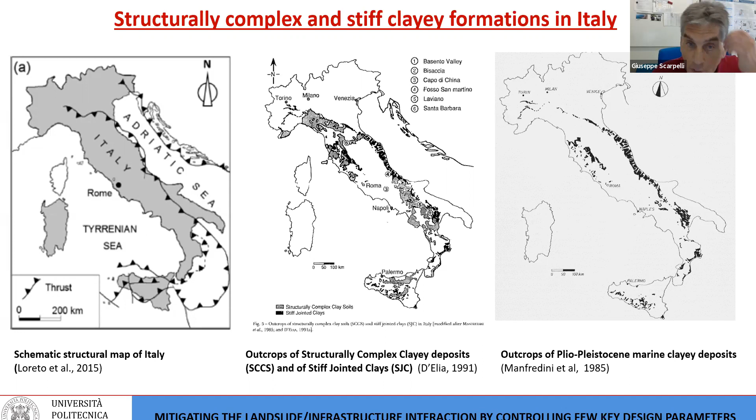So here's a structurally complex clay deposit, a Pleistocene deposit diffused in Italy, and we know how big the difficulties are in building infrastructures in such an environment.

Before entering the main core of this speech, I want to highlight some issues coming from the new generation of Eurocode 7, where I've been involved for many years. I believe the new Eurocode represents a significant change with respect to the present Eurocode 7 because of the introduction of rock mechanics. Rock mechanics is now a true issue within the geotechnical design code in Europe.

Although Eurocode 7 does not account explicitly for complex formations, new issues such as fissures in ground, geotechnical properties of rock masses - so that ground properties shall be distinguished when referred to intact material versus the mass in place - and the influence of geometry and qualification of discontinuities on the properties of rock mass are very appropriate when dealing with structurally complex formations. So I think we now have an umbrella that can cover the complexity of our countries, especially in Mediterranean areas. So we have to update our terminology.

The ground model has been introduced, which differs from the geotechnical design model. It is an important distinction, not always well accepted in all cultural environments in Europe, but nevertheless it's a very important distinction. The ground model is a site-specific outline of the disposition and character of the ground and groundwater based on results from ground investigation and other available data.

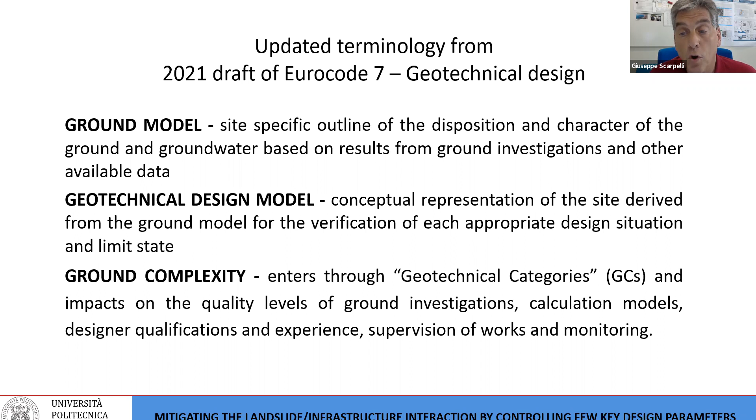Again, the word complexity is actually entering Eurocode 7, which is really important. Due to the joint work of Italians, Spanish, and French people, ground complexity is now a word common in the general idea of Eurocode 7, entering through geotechnical categories. These geotechnical categories impact the levels of ground investigation, the selection of calculation models, the qualification of designers, the supervision required for the works, and the monitoring. So it's an important aspect.

To summarize this bit of the presentation, this is a nice picture taken from Gunilla Franzén and Hakan Garin from the Eurocode 7 people. You see there is a clear separation with this line between the ground model and the geotechnical design model. The knowledge increases from top to bottom. No geotechnical parameters are in the ground model, but derived values of the geotechnical properties are in it. With some time I can explain exactly what it means to be derived values, but these are not exactly the geotechnical parameters for design.

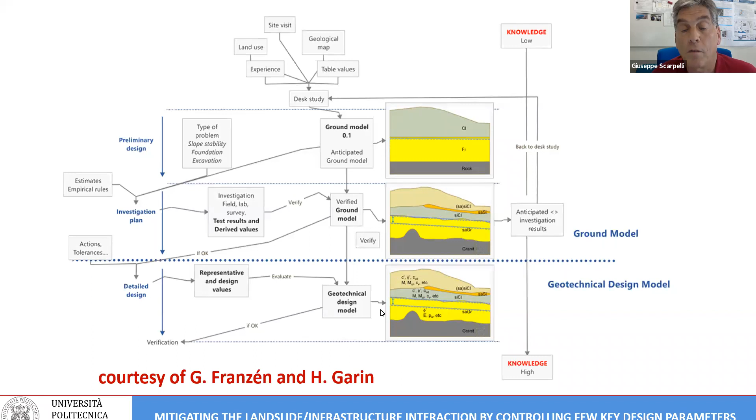So now, according to D'Elia, the complexity of a geological formation is related both to the heterogeneity at laboratory scale and the structural feature at the scale of construction. We have to investigate both, obviously, to be careful geotechnical engineers.

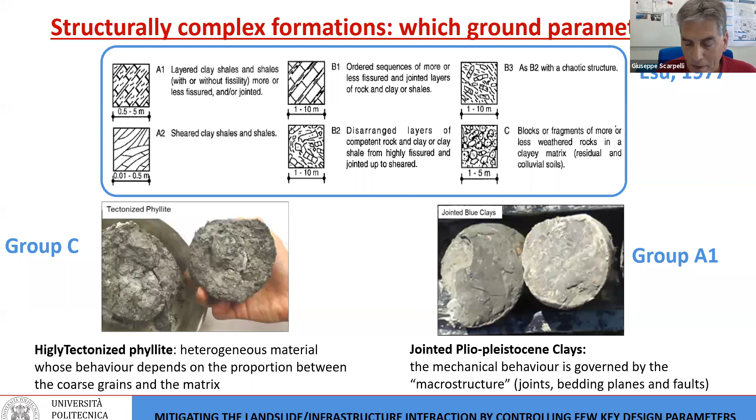With reference to the laboratory scale behavior, just to give an example, I want to stress the first example on the left, the work on this highly tectonized phyllite. It's a heterogeneous material, the response of which is dependent on the proportion between the coarse grains and the relatively soft clay matrix. I have seen a presentation about that in the past days, and it is clear that the friction for this material has to be selected according to the proportion of the fines, to the grading.

Very nicely, the methodology of using reconstituted samples, reconstituted mixtures, can actually help in selecting the appropriate value of parameters or properties with reference to the natural material. It's difficult to be sampled, but nevertheless we can use appropriate methodologies in the labs to understand what could be the right properties to select.

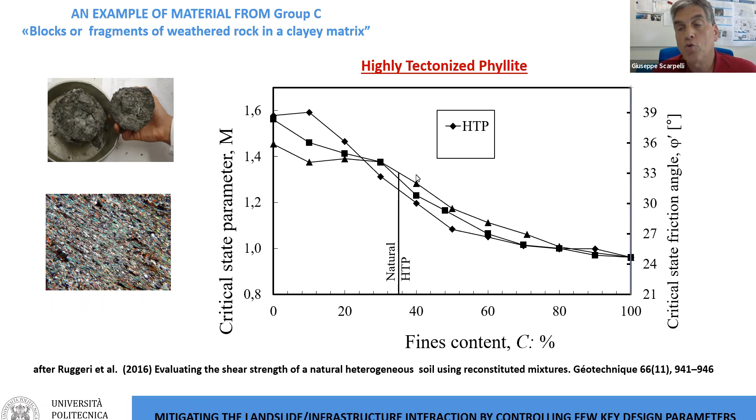And it is important to see how big changes are when you pass from the grain sustained material to the matrix sustained material.

Addressing the problem at the geotechnical work scale, we have to select one model: should a geotechnical model be a continuum model, or a discontinuum model? Here we use the definitions from before. The ground model is the same. If we look at this excavation, the ground model is the same, but the geotechnical model is different.

For the solution of the stability of this excavation, on one side, what is the right geotechnical model to select? An equivalent continuum can hold in this case, but cannot for the discontinuum on the other side.

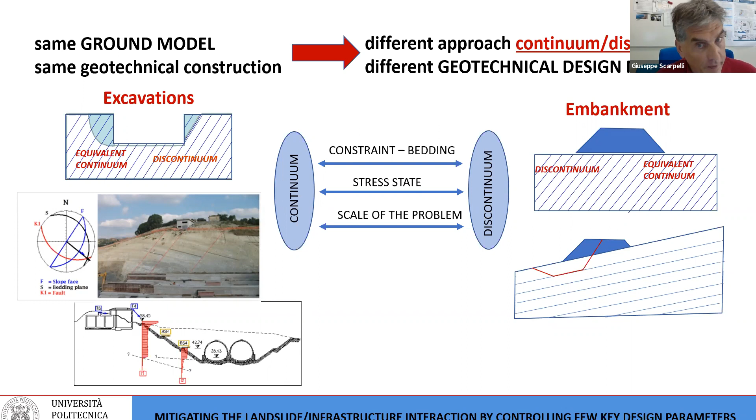We have seen today some important reflection of how the stress state can influence the overall behavior of the excavation, and the scale of the problem, of course.

The case study I want to address is an embedded retaining wall in stiff jointed clays to protect an excavation, not very deep, a 6.5 meter high slope. The place is in the south of Italy, again along the E90 European route, and this place is called DG21, a specific segment near Catanzaro.

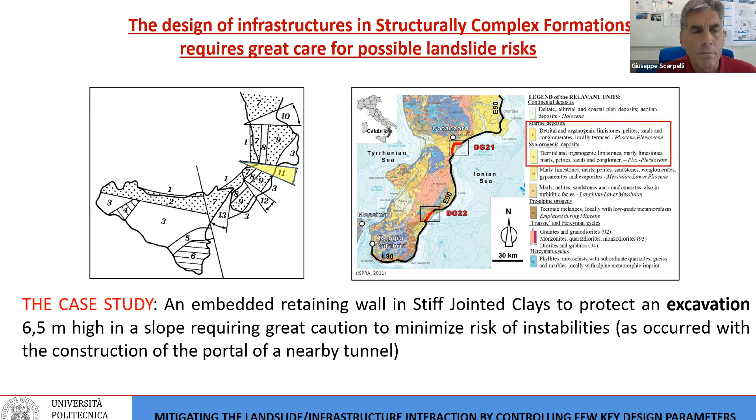The case study is interesting because, for such a small excavation, the designer's decision was to adopt a very big, very strong retaining wall, made of 1 meter and 2 bored piles, all connected with a strong beam on top. It seems really a large geotechnical work for such a small excavation.

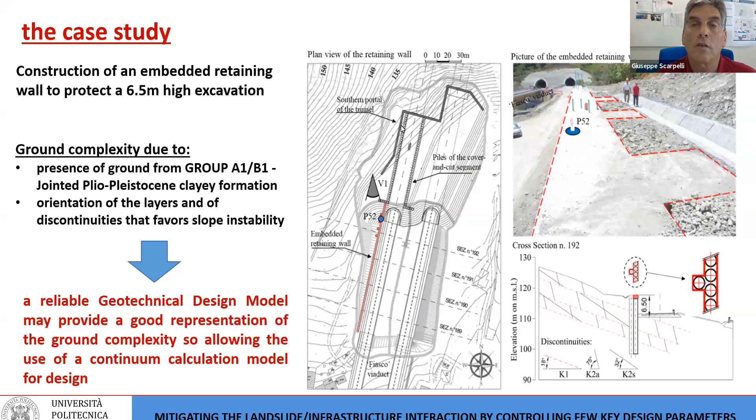But the slope was not very safe. The slope itself was affected by bedding, by discontinuities, associated with movement along the beddings. We recognized that through the experience made just a few months before with the behavior of these retaining structures at the portal of the tunnel in the nearby area. This is clearly appearing in this slide, the problem coming from that portal.

And here we have the displacement being measured by topographic survey during the excavation of the wall.

These are the evolution of the horizontal displacement during the progression of the excavation, with tension cracks opening and making free the advancement of this soil deformation along this slope.

Again, the recognition of the ground model was a bit poor at the very beginning, and then it was the experience, a sort of observational method—not the right way to apply the observational method, obviously—but the observation made clear how useful it can be to know in advance the exact assessment of the ground model at the beginning.

And so we had to solve the problem in a very similar way for the tunnel, as was presented before by Professor Jovicic, with prolongating the tunnel, cut and cover methods, and trying to reduce as much as possible any stress release in the slope.

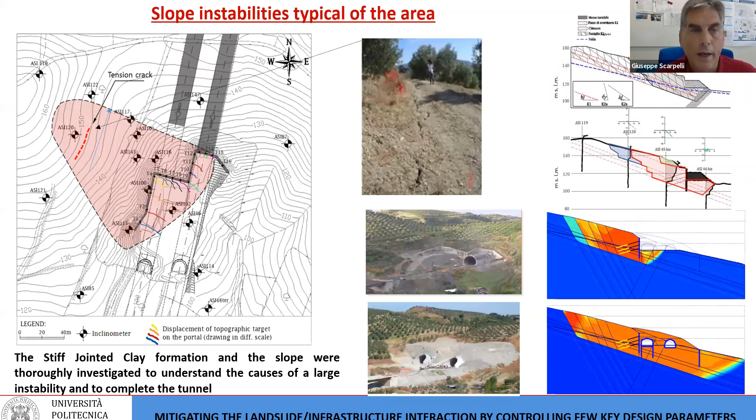What is very important is that we need really to characterize properly the ground model. This was done as a consequence of the instabilities and the movement at the tunnel portal, so we had a clear occasion to use every tool: site inspections and geological mapping.

Also, I want to note that geological mapping is a word that is clearly coming into Eurocode 7. So it's good to hear about that today.

At the tunnel front it was possible to make all the observations needed to clarify the ground model, and also the properties of the ground, with samples at laboratory scale.

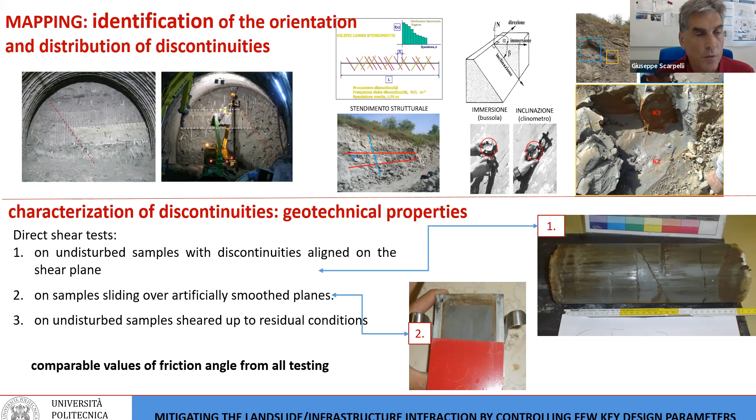Obviously, it was necessary to characterize the discontinuities, expecting that the movement could occur mostly along them. We tried different techniques to minimize the strength along these discontinuities, with not very much success, I would say.

Here we have a look at the whole picture of the laboratory testing results. We have unstable, brittle behavior of samples, and we could characterize peak strength. We could also characterize what we could call residual strengths along the discontinuities.

It's nice to see that during the coring from the boreholes, it was possible to have an idea of the position of such discontinuities—not really directly observable, but just by breaking these cores by hand in order to highlight where discontinuities were.

And looking at the profiles of inclinometers placed along the slides, it is clear that some discontinuities are clearly active from these profiles.

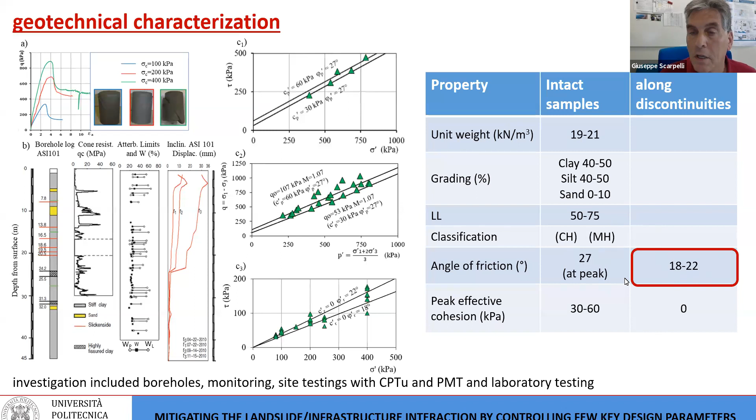Values of the angle of friction along these discontinuities appear to be a bit high with respect to the plasticity index, to the soil plasticity, but well, that was what came out from the results.

How do we manage such complexity in practical design of infrastructures? A possible solution is to condense complexity into representative geotechnical design models and analyze the problem with the simplest possible calculation model. This is a possibility.

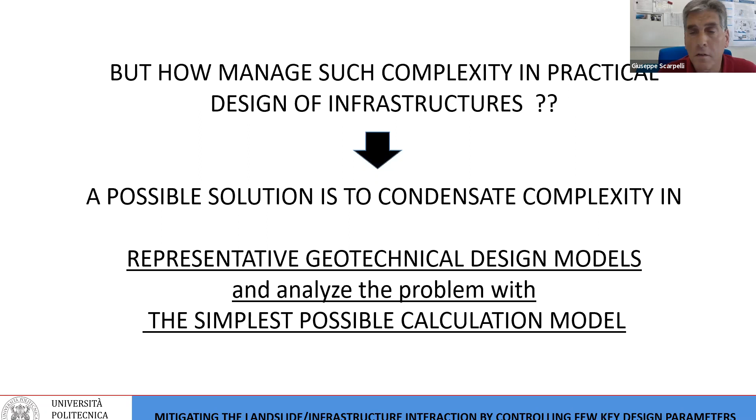And to do that, we want to understand—the object being the retaining wall—the question of how these discontinuities can influence the ground pressure on the wall. Remember, that is the problem: how to design that wall. Can we find a simple calculation model for the ground pressure prediction?

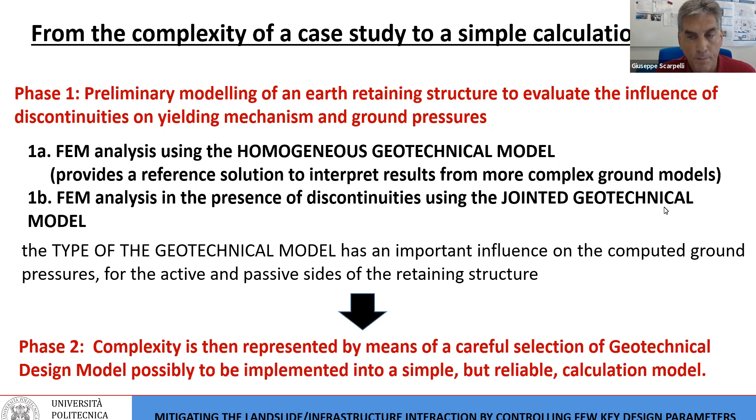So we tried to make an assessment using a finite element model, which is not a simple model, but just a way to arrive at the simple model. We adopted two geotechnical design models, one homogeneous and one jointed, with a very simple analysis using elastic-perfectly plastic soil, a Mohr-Coulomb kind of model.

It's a purely theoretical example where an earth retaining structure is artificially displaced into the soils to produce formation of yielding zones at the back of the wall and in front of the wall.

Displacements are imposed, and interface elements are adopted for the contact between the structures and the ground, and associated and non-associated flows were analyzed.

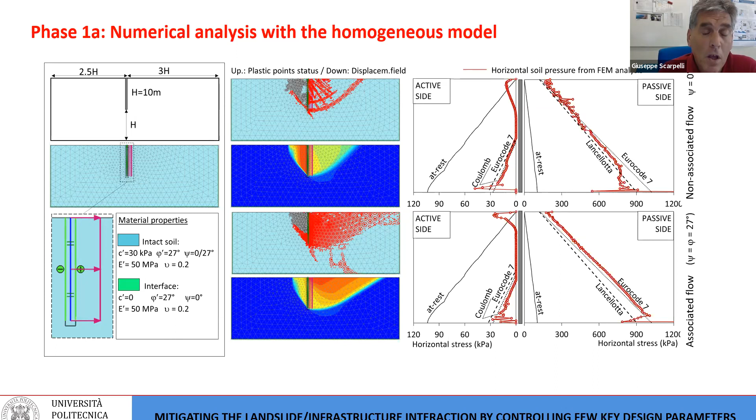What is the result of that? We want to understand whether the ground pressures were predictable with such a model in an appropriate way. There was cohesion in the constitutive model, so indeed we found no ground pressure on the active side, mostly. Perhaps the displacements were not enough to put the soil into an active state, but we were quite satisfied by the results in general, giving us a bit of confidence in the use of this model.

Then we introduced discontinuities, and this was quite interesting because we arranged discontinuities differently oriented to see what could be the influence on the wall, and then we discovered the hot water—meaning that when the bedding is in favor of the formation of yielding, then the ground pressures increase quite a lot.

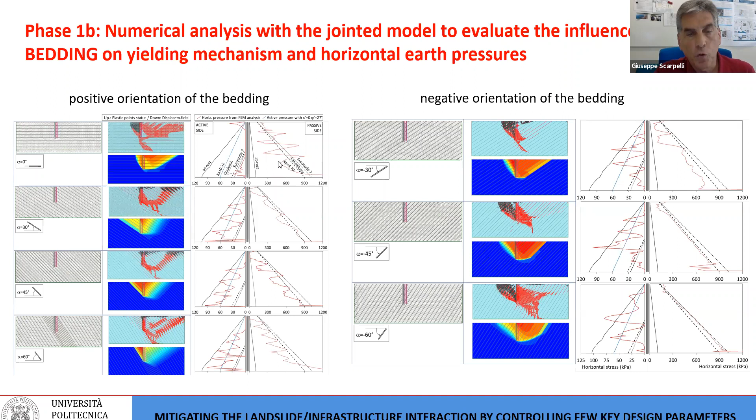I want to stress the results of applying such modeling on the active side: not much influence when the bedding is favorable, horizontal, or at a negative angle, but largely influenced when the bedding is unfavorable to safety. At the passive side it is moderately influenced by the bedding orientation. This is for the yielding mechanism, to understand the zone of influence around the wall.

For the earth pressures, at the active side the pressure distribution is strongly influenced by the presence of the bedding at any orientation, even when it's favorable. At the passive side, the pressure distribution is influenced a bit less, with about 20% reduction of passive strength, passive pressures in general. So what is the message here?

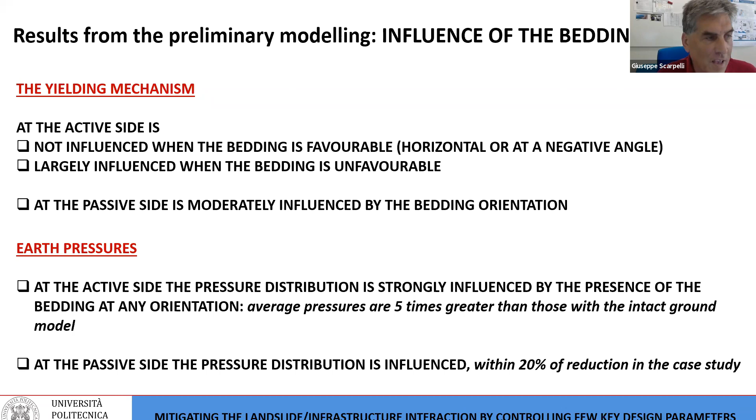Basically, to account for the presence of discontinuities in the model, we can consider an effect on the ground pressure by representing damage. Having introduced a lot of damage with all these discontinuities that actually interrupted the continuity of the model, introducing this damage as a continuous model with a reduction of strength parameters could be good enough for the purpose of design, not more than that, of course.

So the ground model includes discontinuities not favorably oriented at the active side. The geotechnical design model considers zones with different geotechnical parameters to account for the influence of discontinuities. We want to implement a very simplistic model with a spring reaction calculation model with limits, assuming different strength parameters in different zones.

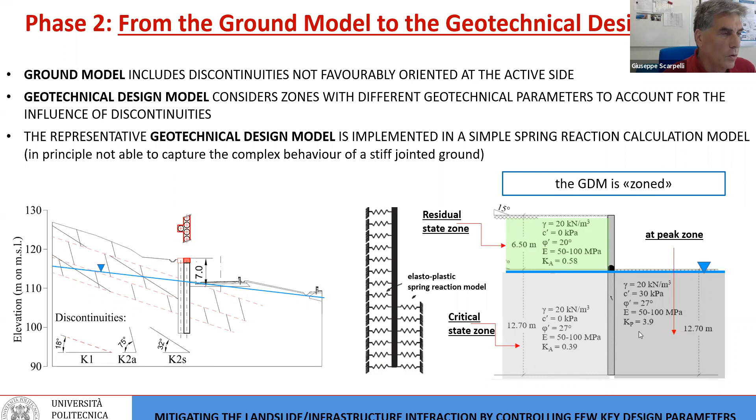So our geotechnical design model is zoned. How is it zoned? We assume a residual state zone at the active side above excavation, a critical state zone at the active side bottom of the excavation. Why a critical state? Because cohesion goes to zero there, but displacements were not enough to reduce friction to residual values. And a peak zone on the passive side, where there is not great influence of displacement on the original values.

What are the results? Ground pressures here go typically higher than the active solution's active side; more or less the ground pressure is close to K naught. So it means that the pressure is pretty high.

Obviously, the mobilized soil pressure at the passive region is much far from any limit state being reached. Horizontal displacements are represented in these graphs, and these are the results. We captured only the shape from monitoring, not certainly the amount of the displacement.

But this was not really the interesting aspect of the model, because our goal was to understand the ground pressures on the structure, rather than to assess exactly the displacement. We are not in an urban area, so we don't need an exact prediction of displacement. The order of magnitude is important, but not the exact prediction from such a simple model. It's not the right model to predict displacement, of course.

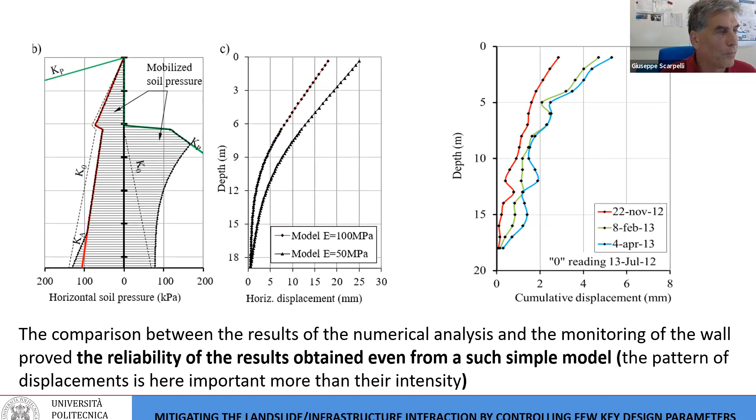Similarly, a zoned geotechnical design model is used for global stability verification: again active side residual strength zone in the upper layer, critical strength zone in the bottom layer, and at the passive side a peak strength zone. This is the global stability around the retaining structures, and this could be a possible approach.

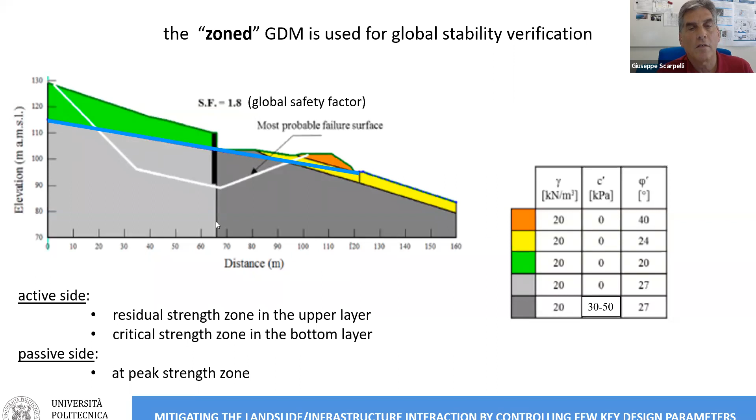Conclusions: design of geotechnical structures in structurally complex formations can be efficiently solved by careful selection of geotechnical design models. Besides assessment of stratigraphy and groundwater, the key tools for this objective are above all a careful assessment of the patterns of discontinuities with the definition of the ground model.

The ground model should be very carefully assessed, along with material properties, specifically the shear strength of the ground for intact, critical, and residual state conditions as needed. These are all tools we perfectly know are needed, but perhaps when we design, we forget about them. The next generation Eurocode 7 is a step forward for design practice, as well as a great protection for designers.

Thinking back to the presentation we heard yesterday about the big excavation which was failing, it's clear that what we need as designers is protection. So we need to enforce consideration of complexity in the ground when geotechnical design models are conceived. This is a tool to interact with the owners of infrastructure in order to ask for good geotechnical investigations for assessing the ground models. Thank you very much for your patience, and I close.

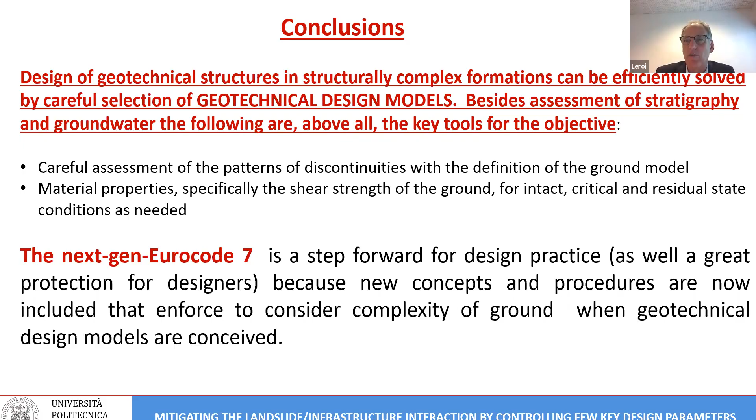Thank you very much for your very interesting presentation. As you mentioned, that's a key point because it shows the complexity of our job when we are faced with reality versus modeling. You mentioned the importance of the ground model to protect the designer, because at the end they bear the responsibility. So that's very, very interesting.

You were saying that geotechnical design models are conceptual models, but I would say that's a ground model. You start conceptual, you start a virtual representation of reality as well with the ground model. Conceptual representation starts with the ground model. That's difficult, of course, but you point out a very interesting question regarding responsibility, regarding how we have to proceed, and how we need to have a very clear and as accurate as possible ground model to be capable of designing well in terms of geotechnics.

If there are any questions for the Professor regarding his very interesting presentation? I do hope that there are already people here. I know we are close to lunchtime, but I would say it would be very interesting if we could have questions, because once again it was a very, very interesting presentation, introducing a very key question in our job.